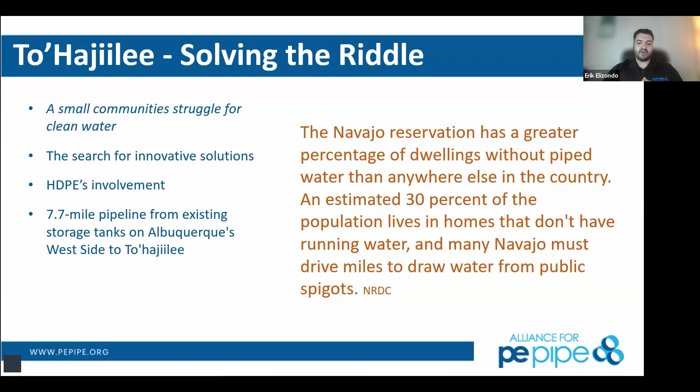It is one of our sales reps' projects out in New Mexico, but it's an awesome project for us to talk about because of the involvement and the impact that it had. The To'Hajiilee project in New Mexico was for a small community struggling to have consistent water. So as you can read on the slide there, it's one of the areas in the nation that has the least amount of public water to housing. So in order to fulfill that need, the residents in that area needed to go and find that elsewhere or drive to the spigots to get water. So HDPE's involvement and our involvement is essentially to help solve this with a 7.7 mile pipeline coming from Albuquerque on the west side all the way out to this small Navajo Nation.

This was obviously something that was deemed an issue by the Commissioner, Debbie O'Malley. They have been searching for some type of resolution, and it had been something that had been on the plate for quite some time in order to ensure that these residents in the area were finding or getting a sustainable water source for an ever-growing smaller community in that area.

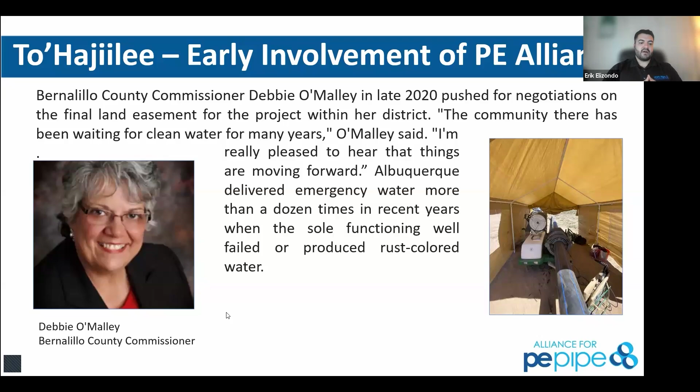What ended up happening, go ahead Alan to the next slide, is Souder, Miller, and Associates actually attended one of these webinars back in 2022 about Open Cut and HDPE's application in that. From that, there was obviously the sparked idea of being able to conquer some of the environmental issues that were going on with the inclines and declines, and being able to move the water all the way from Albuquerque through to To'Hajiilee in order to ensure that these communities got water.

And so they ended up getting together with the PE Alliance. And one of the reasons I like talking about this is it shows the capability of the webinar serving as an initial starting point for projects that move towards HDPE adoption in order to solve long-term issues.

I remember that one in particular. That was one of the very first open cut construction webinars that we did, Eric. And they came to us several years ago and said, 'Hey, we've got this cool project where we think this could work, but we're not really sure.' Walk through it. All of the excavation, deep part of it was a deep excavation, but you guys did really good. And I'd love to see that municipal cycle all the way back through to the end of it here, where you're really supporting the nation itself to be able to push this along.

So thank you so very much for helping them all out.

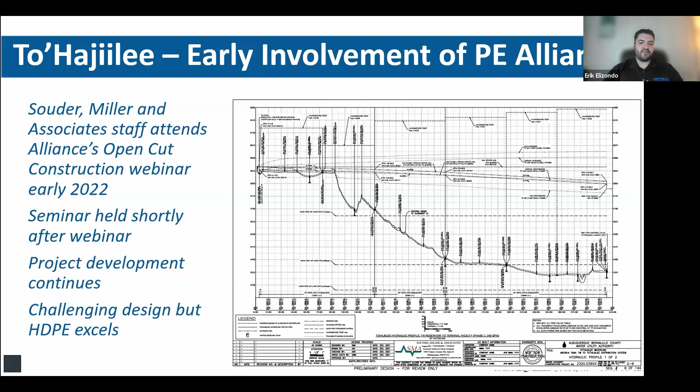After that, it went to bid. AUI, the general contractor we ended up working with, after they got all the rights secured and the pathway secured and had a plan, was a new contractor to HDPE installation in this manner as well. Partnering together from the PE Alliance to the municipality, to the contractor, and lastly to us, to ensure appropriate materials as well as training for doing fusion appropriately, was a task that lasted a span of what is now 3 years, from the original time of attending that presentation, that webinar in 2022.

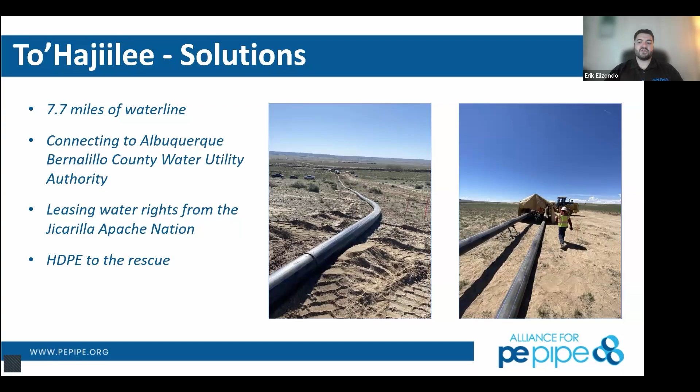There are several different areas in this. They tried to limit the amount of pumps and valves in the system in order to transmit it the entire length. In the project, it's really cool to see the different DRs being used, from a DR7 all the way through a DR17, to accommodate some of the issues with elevation and ensure proper flow, all the way through to ensure that by the time it got to the nation, there wasn't going to be a reduction or loss in the volume of water getting to them, to ensure appropriate water for the entire community.

So Milford, along with AUI, went out, got the training completed, got their guys ready to go, and got set up to do this project out in the middle of nowhere. It was just a really cool project as a whole for us.

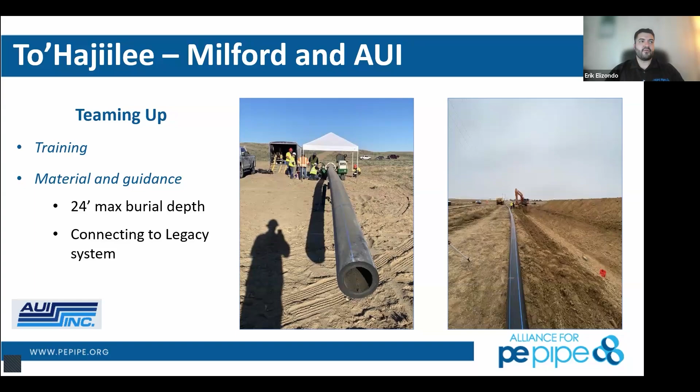For us to see from the beginning stages of having an idea of a need for a small nation, to finding a solution that would complete this task most efficiently and most cost effectively, and to see that HDPE ended up becoming the most preferred method of doing this in an open cut scenario, where you have the option of looking at several other materials to accomplish this job, and yet HDPE was the one that came out on top. That's some of the reasons I wanted to talk about that project.

Well, I'm glad you did. You didn't talk much about the contractor, but Albuquerque Underground is a very experienced polyethylene contractor. I've known those guys for years, Eric. What was it like to work with an experienced contractor on a first job for Souder Miller and also the Navajo Nation?

Yeah, so they've done a lot in the HDPE world. This, I think, was a little bit different than what they're used to. It was something they did have some questions about, especially when we were talking in the realm of specs and approvals. We did have a back and forth with their field hands about getting the right information and documentation, but overall, because they had some experience, it was rather smooth, other than essentially paperwork, Pete.

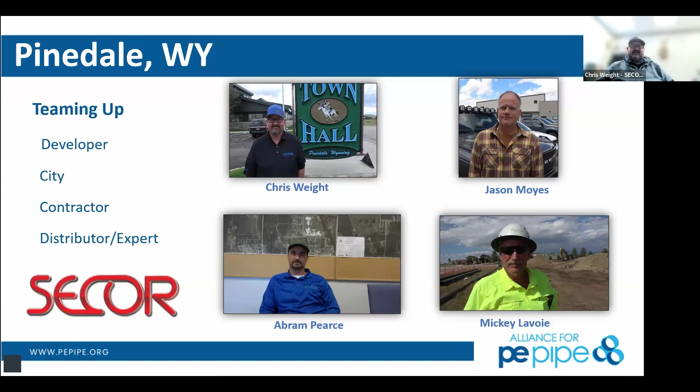The team up there is key, getting everybody on board and on the same page. We did that with the help of Dustin Langston at WL Plastics and my team going down and meeting with all these guys, doing a lunch and learn kind of like this webinar, but live. They had all kinds of members from the municipality there learning about what we could do on this project.

It was an open cut install. We did approximately 2,000 feet of 8-inch DR11 water, and approximately 1,800 feet of 8-inch DR17 gravity sewer.

Thing to keep in mind on the gravity sewers, we did have to debead that, so it took a little bit longer. But we got this entire project set up, installed, and backfilled. They were putting asphalt on the ground and building houses by the time we got to the end of the line, to where they could start selling these lots off.

This is a little town we're dealing with, but we were dealing with depths of only 7 to 9 feet. As you can see in this picture behind the guy doing this tap, the groundwater was really high down here. So we had to ballast the pipe and get it to sit on the ground at grade, then backfill with our aggregate and go from there.

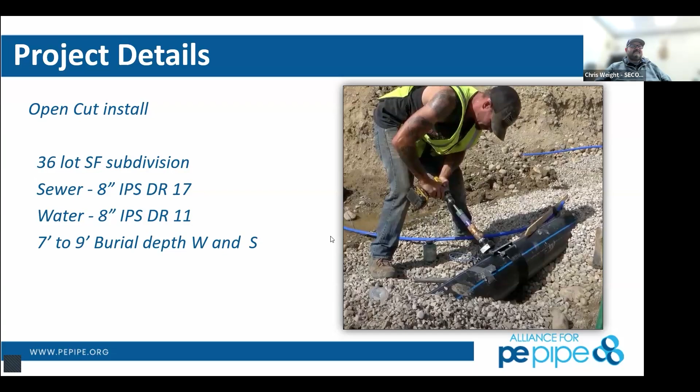A few pictures from the project you can see here. We ran all AVK Series 66 valves - a great solve to not have to run mechanical connections.

Concrete manholes, all the sewer - they kept everything tight. When they cambered it, they found one spot in 1,800 feet that had about a quarter inch of water in the bottom of the pipe. That's how tight of a spec the contractor maintained on all of that.

The other nice part about the HDPE in this situation is EPA stated that we had to be 10 to 12 feet apart with the Bell and Spigot legacy material. Once we proved to them on the HDPE, they let us go down to 6 to 9 foot separation on this entire project, which made the excavation a lot smaller and helped us out quite a bit there.

Hey Chris, you talked about the AVK Series 66 valve. Tell me what makes that different from the traditional AVK seated gate valve?

Yes sir. So the AVK Series 66 valve is actually a fused in-line gate, AWWA gate valve. They press the pipe on, put stainless steel rings around it, wrap them, and there's no mechanical fitting there whatsoever. You just butt fuse it right in line, or electrofuse it however you want. It's a great solve to keep mechanical connections out of the ground, since every mechanical connection can become a leak point at some point or another.

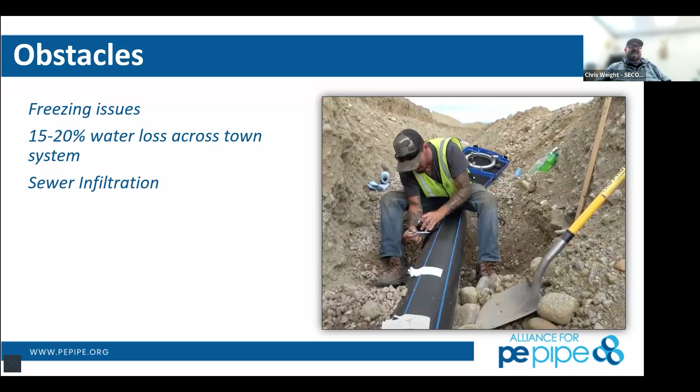The main lines weren't as bad. The town itself was running 15 to 20% water loss. Obviously HDPE is going to cure a majority of that, and their sewer infiltration was atrocious. They were selling approximately 500,000 gallons of water and taking in 1.2 million gallons of sewage into their sewage treatment plant, which was huge. That's why the HDPE was decided upon, so we didn't have any infiltration problems.

This is just a typical installation that we were dealing with. There was a cul-de-sac in this, and we ran everything around, so it was a complete closed loop system, but they had the ability to divert and shut the cul-de-sac out if they had to do a repair or anything like that.

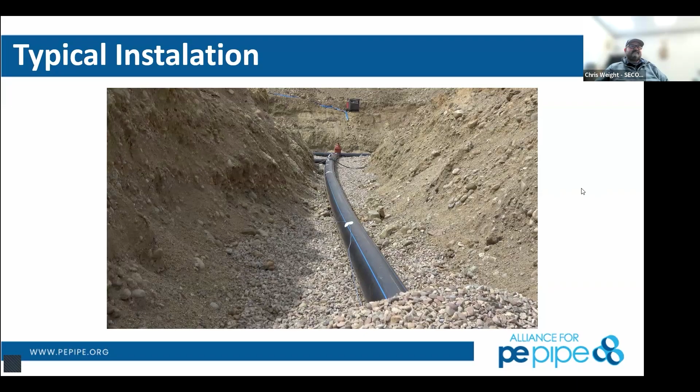Here, we did just do this - it was all completely wide open, right? So we fused this because we had to.

So Chris, that's showing your Series 66 up close. What's that light blue pipe? Are you doing a pressure test right there? Yeah, so that's how we filled the line to pre-chlorinate and pressure test ahead of the line being put in service, which was extremely nice because you can do that with all polyethylene. You can pre-chlorinate and pressure test above the ground.

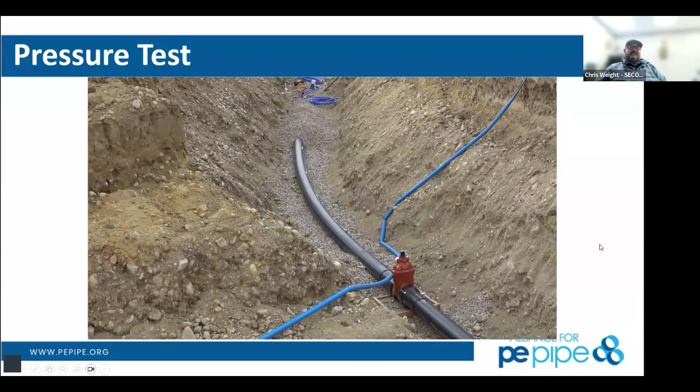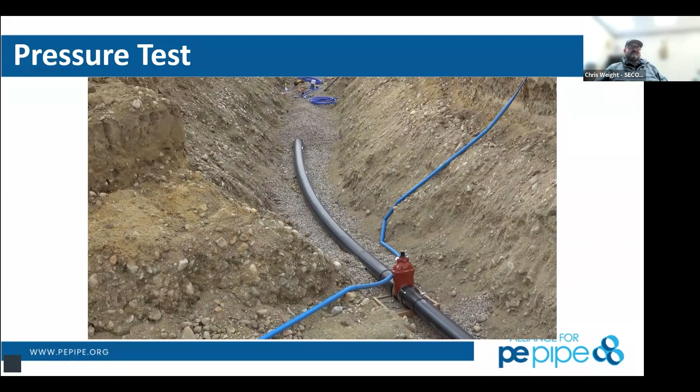Or you can have it in an open cut situation like this, sitting there, and pressure test and pre-chlorinate right there. But that blue line we actually ran from a fire hydrant down to chlorinate with the city's already chlorinated water. They gave us a chlorine spec that we had to meet at the end of the line, and we met that spec, let it sit that way, and they were good to go and put it all in service.

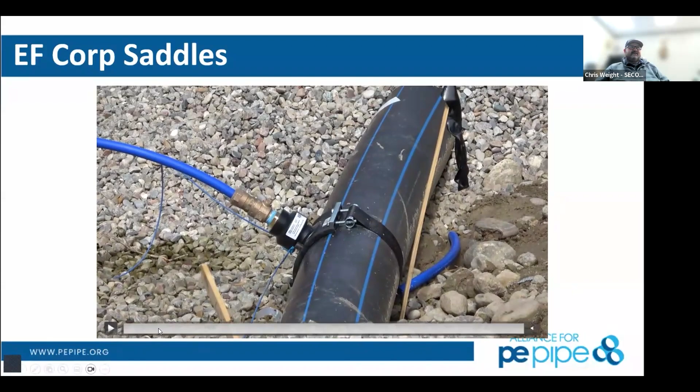Another picture of a tap, this is how we were tapping the lines. We used integrity saddles with 1-inch corporation stops that were compression onto HDPE. Yes, it's blue, but it's still HDPE SDR9 service line, 1-inch CTS.

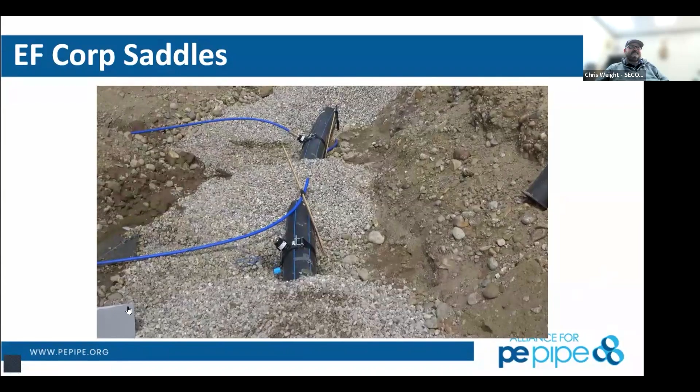Here he's actually going to tap this line in a live tap format. Yeah, Chris, we haven't shown this ever in the webinar program before. So this integrity saddle, we call that an electrofusion corp saddle. It permits the owner to put a corporation in there. So this line is charged.

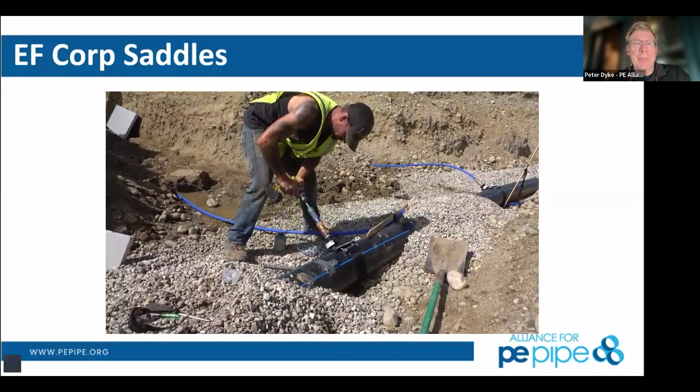With that drill, he's running that drill bit into the wall of that polyethylene pipe. And I guess, Chris, it retains the coupon as it comes back out? Yes, the cutter actually holds the coupon when it comes back out. They'll pull that up inside. You can see a little bit of leakage coming by. He'll close that corp stop, but that coupon's up in the cutter. So when he pulls that cutter out, he'll have to take the coupon out of it. He'll just screw his tap tool right off of there. He'll purge the line, hopefully, so they're not shoving any little potential shavings up into the service line and into the meter.

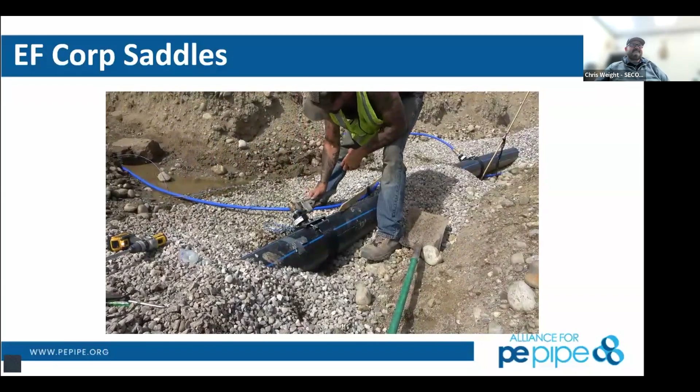Again, you can see how close the water and the sewer were. These are actually running right in the middle of the roadways. Great situation here for an open cut installation.

Actually, in actual fact, the elevation of that sewer is higher than the elevation of the water, which is something unique. I love that you educated Pinedale enough so that they could do this with confidence, because neither one of them leaked. So I guess it really didn't matter.

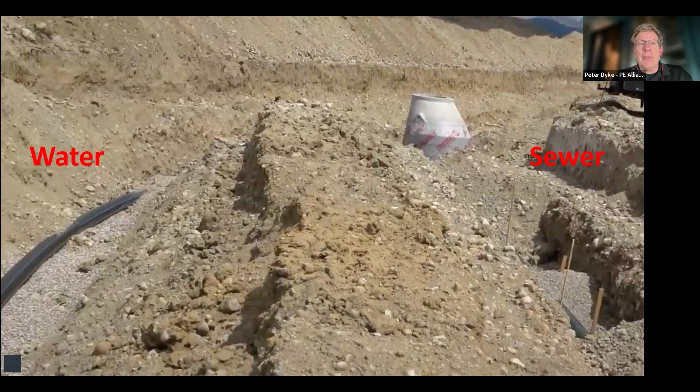Just to add, you called this a little town, but it's a town that's really growing pretty quickly just south of Jackson, Wyoming. Yes, sir. The developer doing this actually has some more projects on the horizon, and he gave me a rough number at one point that he was going to more than double the town's population in the next 5 years. So it's going to be a very sizable town, and obviously Jackson, Wyoming is spreading out, so eventually it could be one of the bigger municipalities.

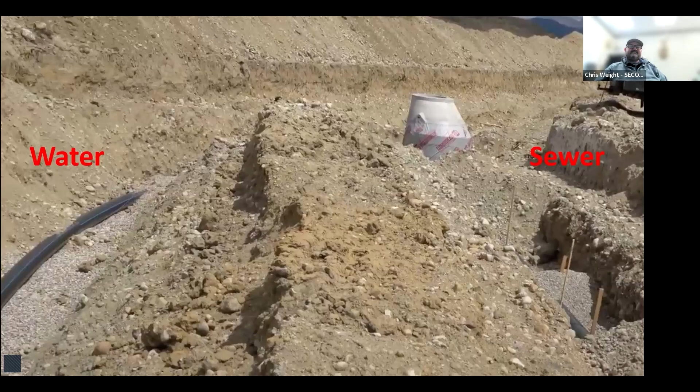So this video kind of speaks for itself. This just shows you how resilient polyethylene is. I got to jump in the trackhoe and run this over just to show. And in the middle there, you can see.

Wait, hold on a second. Alan, could you click on the play button? Actually go on the screen and click on play, because it's buffering.

In the middle of this, right close to the middle of the track, we actually have a fusion there where we made the fuse, let it cool the minimum amount of time we possibly could, and took it out of the machine and then ran it over with the excavator.

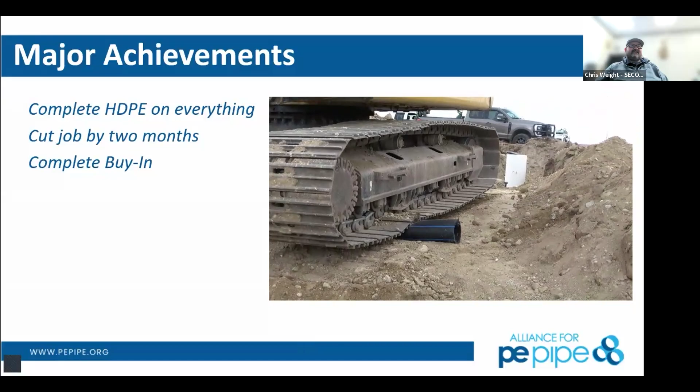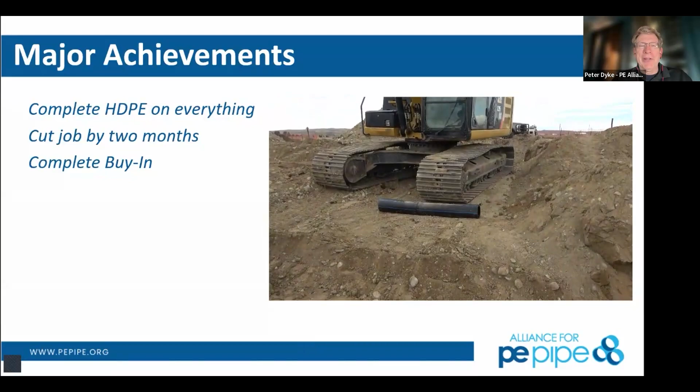Yeah, this falls under the category of let's not do this at home. But Chris was kind enough to get in that excavator and drive over it. And then we just brushed it off to show the fusion and also show that the tracks really didn't damage the polyethylene. Now, Alan, we do have rules, and these kind of violated the rules for compressing on the polyethylene pipe. Am I right or wrong?

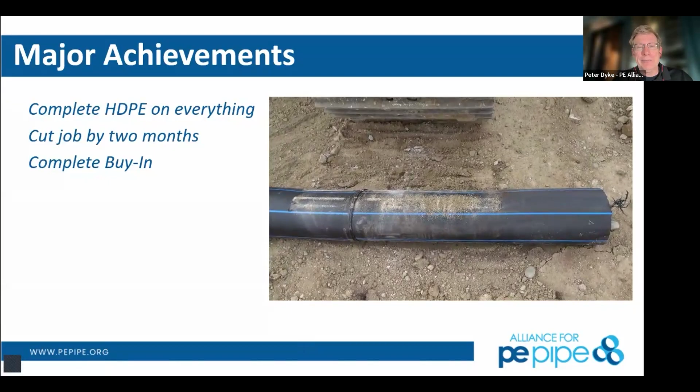You're absolutely right. What's going on is if I type an answer, Pete, and the video is on, then it just distracts from it. My phrase for this was, why would anybody want to jump out of a perfectly good airplane, right? We have a perfectly good butt fuse joint.

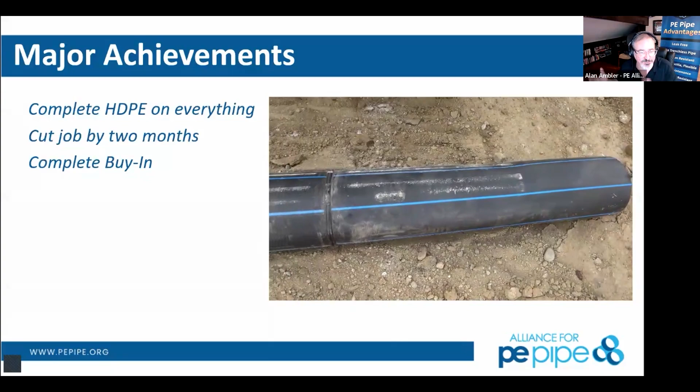Let's keep it going. But you can fully occlude the pipe by squeeze off. If we go down at a specific set time period for the DR and the size of the pipe, and then we let that squeeze off relax through another time period, as long as we don't violate those two time periods, then we do not damage the pipe in that manner. It's often used very much so in the gas industry itself.

But gosh, look at the visual alone. You guys, part of what the Alliance and Chris does is come up with all these really cool things to do, and you certainly did overachieve, and that is a true compliment, Chris. So good job. Oh, thank you, Alan.

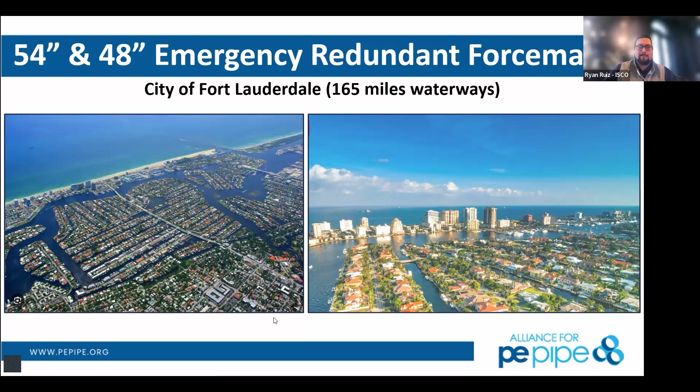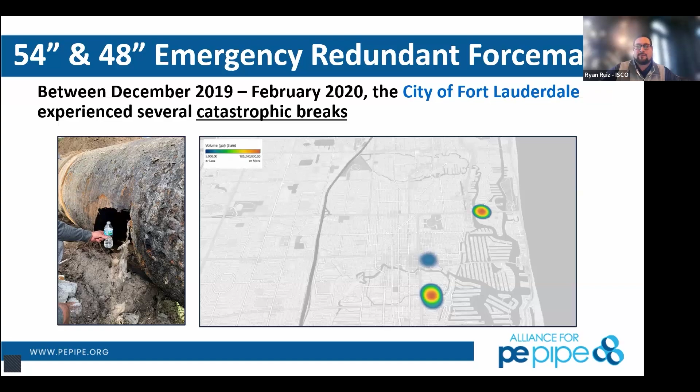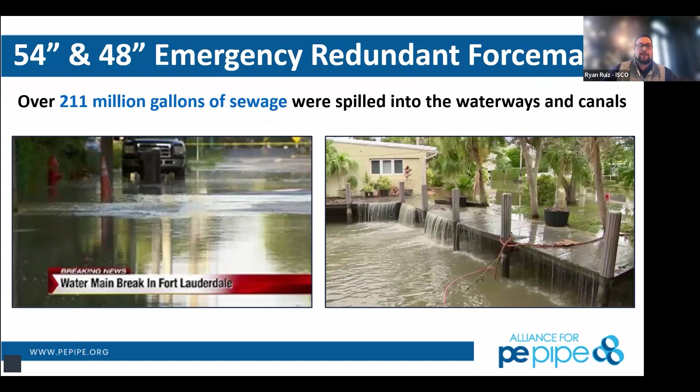Between December 2019 and February 2020, the city of Fort Lauderdale experienced a lot of catastrophic breaks in their sewer force main. As you can see here, there's a large amount of pipe missing. And on the right, this gives you an idea of these catastrophic failures and the areas they were in within Fort Lauderdale. Over 211 million gallons of sewage spilled into the waterways and canals. They had vac trucks working 24/7 for close to 5 months to help remove some of the sewage that was being spilled into the city's force main.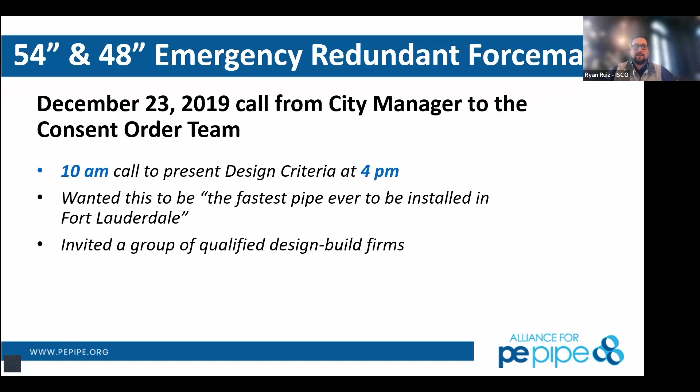So in order to do that, ISCO teamed up and invited a group of qualified design build firms to help - basically a design build type opportunity project. Two teams were selected, basically broken up into 2 sections or phases - a north phase and a south phase, roughly 38,000 feet of pipe, $65 million, and about a year and a half of construction. You had the city of Fort Lauderdale teaming up with Murphy Pipeline and DM construction groups and engineers to come up with solutions - a lot of trenchless solutions and some open cut.

But let's move to the next slide, please. Yep.

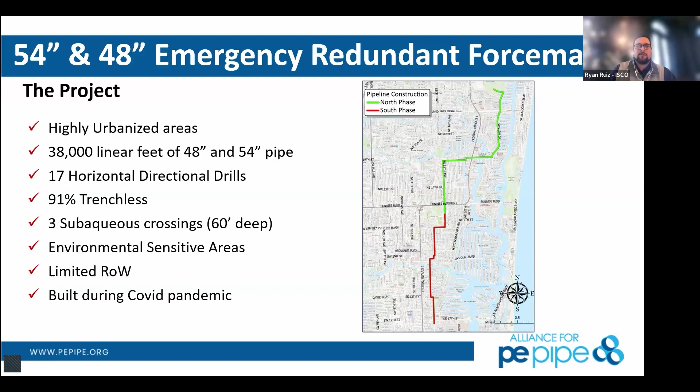So the project here, looking at the map, highly urbanized areas, a lot of homes and businesses to work around. Like I mentioned, 38,000 feet of 48 and 54-inch DR17 pipe. Had 17 HDDs, most of this project was trenchless, some as deep as 60 feet on some of the directional drills. Being in these urban areas, you have very limited right-of-ways to do these projects.

So why HDPE? I get that question a lot. Here in the Fort Lauderdale area of Florida, there's high salinity in the ground, a very corrosive environment. HDPE is very abrasion resistant, so it reduces any scouring that could happen to the material.

Another huge thing was the ability to manufacture custom-made fittings on site, which we'll look at in a little bit. There were some prefabricated options with HDPE, but what made polyethylene great for this opportunity was the ability to make custom bends and fittings on site.

Also, HDPE is considered jointless and restrained pipe, which allowed for less clearance from other utilities. One unique part of it is it's also leak-free. In many instances, the spacing we put between a gravity sewer system and a potable water system, or vice versa, is dependent upon one leaking into the other, and we simply don't want that to happen. We had some questions previously about leaking, and it's a leak-free product.

So keep going, Ryan, you're doing great. Thank you, Alan.

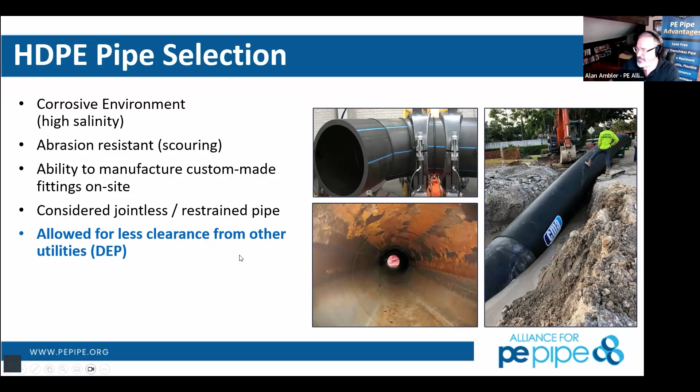Mentioned majority of the job was trenchless applications, 91% to be exact. There were 17 directional drills that helped avoid DOT roadways and things like that. This project also consisted of some compression fit lining of pipes that were failing.

Pretty amazing stuff going on here. You can see 54-inch, 3,100 feet of 54-inch shown here on the left image. The 48-inch, two examples here, one very impressive one in the 2,600 feet of reverse compound curve that the driller made. Pretty amazing stuff.

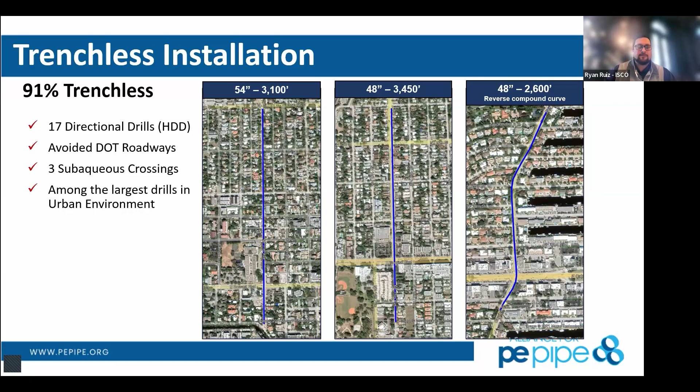Some pictures of job site conditions, whether it was fusing and laydown areas. Here's a picture of a fusion operation in a very limited right-of-way in this urban area of Fort Lauderdale. They're basically building out strings of HDPE pipe, preparing it for trenchless installation.

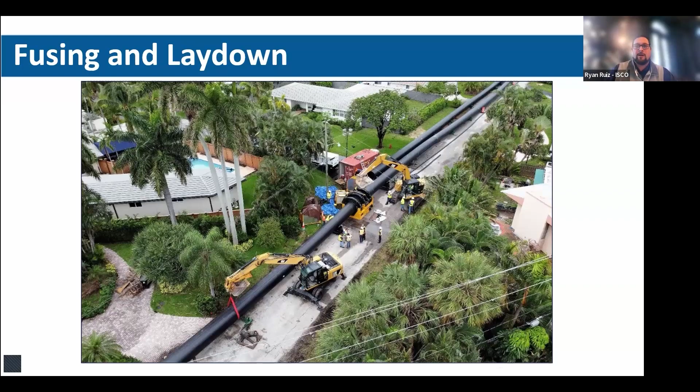Next picture. I mentioned this earlier, HDPE is fully restrained, so there was no need for mechanical restraints. These are butt fusions that are as strong, if not stronger, than the pipe itself, so there's no need to install mechanical restraints on this job.

This picture at the bottom shows a directional drill that was made up 60 feet deep, 1,600 feet long, under seawalls, with environmental permitting through the United States Army Corps of Engineers. Just an incredible opportunity here for HDPE to excel and create an awesome solution.

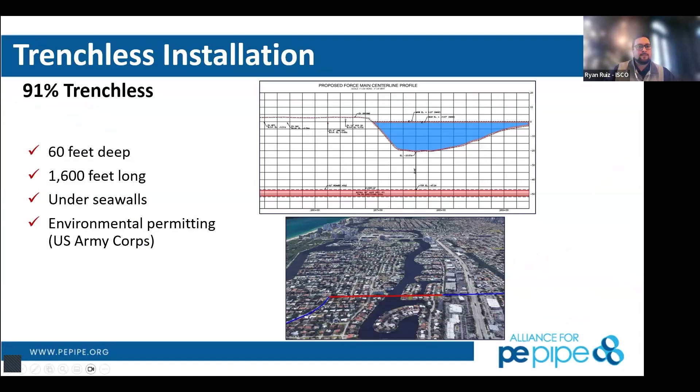So I had mentioned custom-made fittings, or the ability to make fittings on site, mitering pipe and fusing it together to make custom elbows and things like that. These two pictures show examples of that, and show some of the utility conflicts that existed on the job. In these open cut applications, just because we were able to open a trench doesn't mean we were allowed to just set the pipe into the ground. We had to navigate these utility conflicts throughout the project.

Hey Ryan, one of the concepts I've heard you talk about is the issue of equivalent dimension ratio as it relates to fabricated fittings. Could you briefly share with our audience why that's an important concept to understand? Absolutely. So when engineers are designing projects, one thing to look at is the pressure rating of the system. What do we need to meet in regards to that rating? For instance, DR17 HDPE pipe is pressure rated for 125 psi at 80-degree temperature and lower.

When you're dealing with fabricated fittings, you have to derate that fitting. So if I were to make a 45-degree elbow, like the two in this picture to the left, out of the DR17 pipe, what we call feedstock, and fuse it together to make that elbow, I'm going to have to derate that fitting lower than that 125 psi rating. So what we do is make the fitting out of a thicker wall pipe, a lower DR, in order to allow for that fitting to be fully pressure rated.

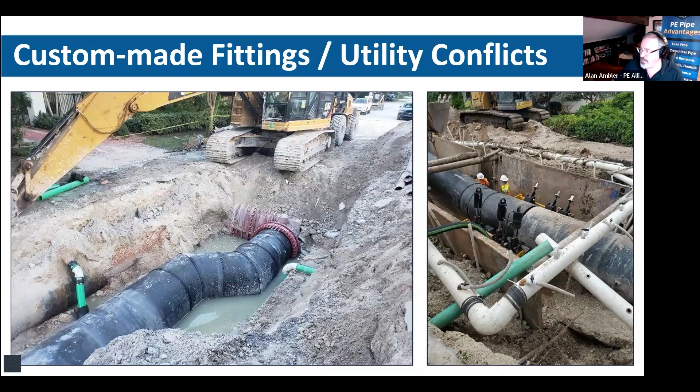You're doing great, Ryan. We are cruising.

All right, so just these next couple of slides are examples of these custom-made fittings, right? And just the interferences, somewhat headaches, right? When we're trying to remedy these issues, you have all these existing utilities that are conflicting with our work areas. So being able to custom fabricate fittings and spools on the job was very crucial.

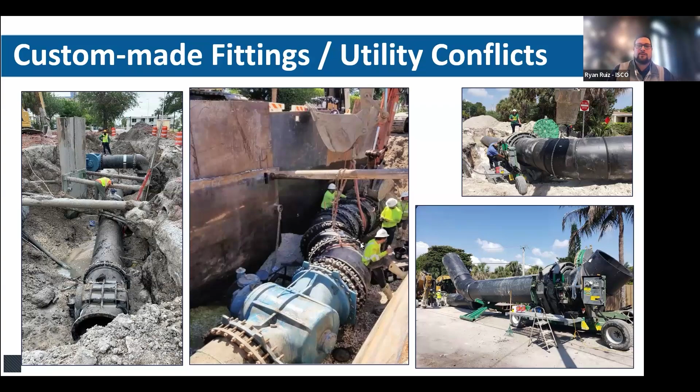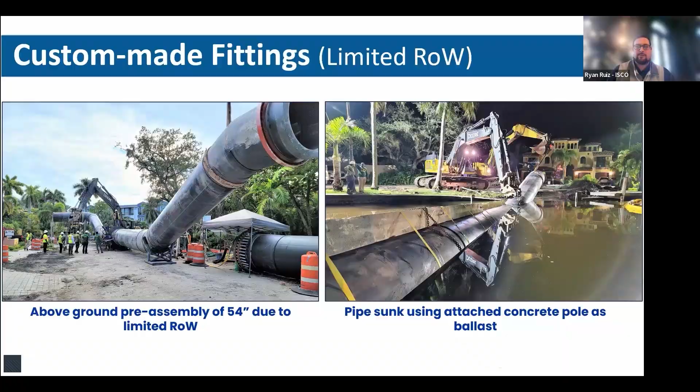So corrosion resistant, H2S resistant. I mean, these are the reasons why this opportunity to rehab and repair this emergency job came about with the solution of high density polyethylene.

Well, great review, Ryan. You know, Fort Lauderdale has taken the lessons learned from this project and they've begun using polyethylene to a much higher level. In fact, most of this was 48 and 54-inch DR17. They now have done the second time this has ever been done, a 54-inch DR11 job in Fort Lauderdale. So great job to ISCO and Chen Moore and Murphy and DMSI for pulling this together and basically saving the day in Fort Lauderdale. It's amazing what polyethylene can do.

Great description. Thank you so much, Ryan Ruiz. Thank you for having me.

All right, moving on. We have another good friend here, Matt Danysh from Agru. That 54-inch DR11, Matt, was made, I think, by Agru.

Yes, that's correct. We made the pipe for that project. They needed the wall strength for it. And we just came on board with making that product in the last year and a half. So something new to the market and definitely a great application to use for that project. Yeah, pretty exciting stuff. And your pipe's going to be featured here again shortly, Matt. So congratulations on having the technical ability to make high pressure polyethylene, so 200 PSI up in those larger diameters.

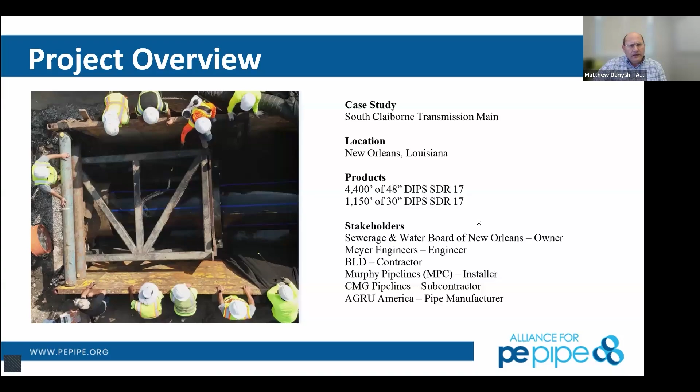This compression fit uses the existing line as a host pipe. And if we go to the next slide, we'll talk about the compression fit.

Next slide. So basically the project was after Hurricane Katrina wreaked havoc on New Orleans infrastructure. And the amount of cost that the storm did was overwhelming, but it wasn't just the storm that did it. They had issues with corrosion that had been going on for a while. And with the storm and the additional amount of moisture in the ground and ground movement, it caused a lot of the lines to start breaking, which caused them to have issues with leakage, shutting lines down, which would bring in infiltrated water.

The boil orders that the city had to have ordered were just incredible. I'm not sure if people on this line can understand the issues with a boil order. Whenever you have to boil your water, it's a tremendous pain to the residents who have to take their water and boil it before they can drink it or use it in any application for consumption. So being able to come up with a solution for them...

So, Matt, it's not just the residents, but also the restaurants and everything else. Restaurants everywhere, right? Yeah, so definitely in New Orleans, that would be a massive impact for a boil water notice. I'm glad you pointed that out because that's a social aspect of pipe failure that's not often thought about. It's mainly thought of as an afterthought, and you have to live through something like that to fully understand it. That's a great observation, Matt. Keep going, good job.

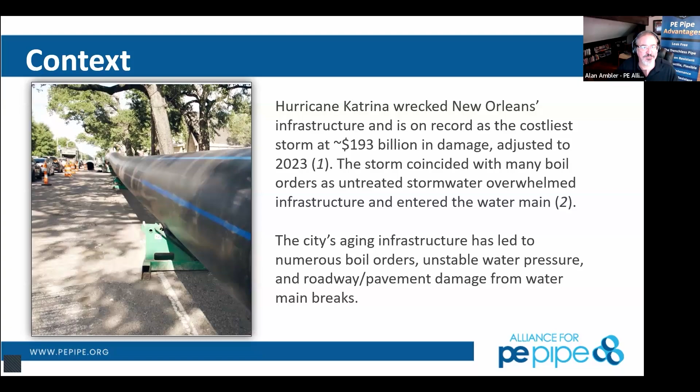So yeah, the city was looking at alternatives, what they can do to fix their problems, because it wasn't just that the broken lines were running underneath city streets. They were having cars falling into holes from the broken water lines. And so to rectify the situation, they launched a massive project to replace their 100-year-old water transmission lines with modern piping systems, which is where HDPE came to mind.

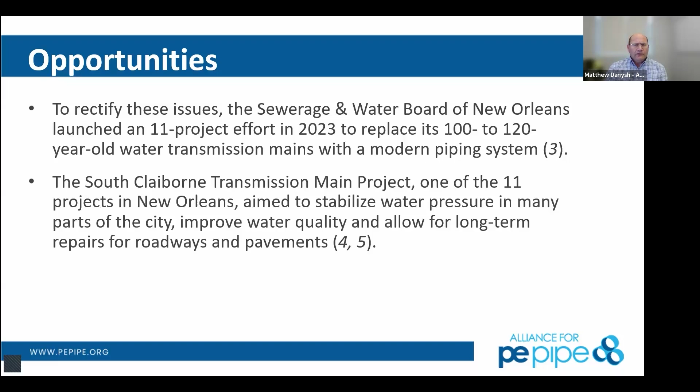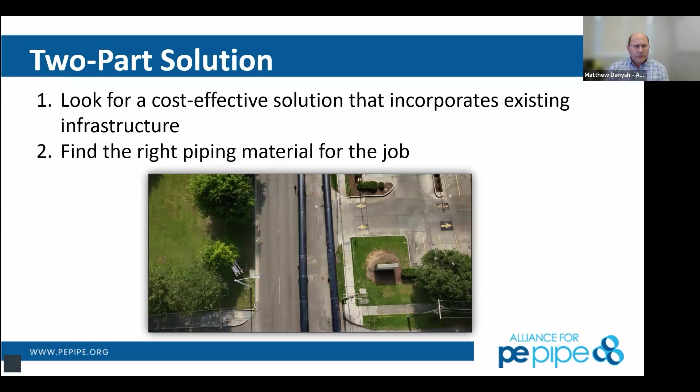Since they have very limited access to the right-of-ways, they couldn't just dig up the existing pipe to replace it. So a very cost-effective solution for this project was to do what they call a compression fit. The next slide will show the compression fit for this material. The reason compression fit was used is because it has the ability to use the existing pipe, and you basically pull a new pipe of HDPE into the old pipe. It has a tremendous amount of pulling force, but we were able to do about 1,200 feet at a time with this compression fit.

The compression fit is basically taking a smaller diameter pipe, or a pipe that may be at the same ID size as your existing pipe, and it's compressed, meaning it's pulled under stress using an orifice or ring chamber to basically reduce the size of the pipe as it's being pulled. This technique was studied for this project, and they figured they could use it because it minimizes traffic for such a busy city with very limited access. Being able to have long strings of pipe pulled in at one time minimizes the amount of footprint that's being disturbed.

Next slide. Oh, this should be our video showing the project.

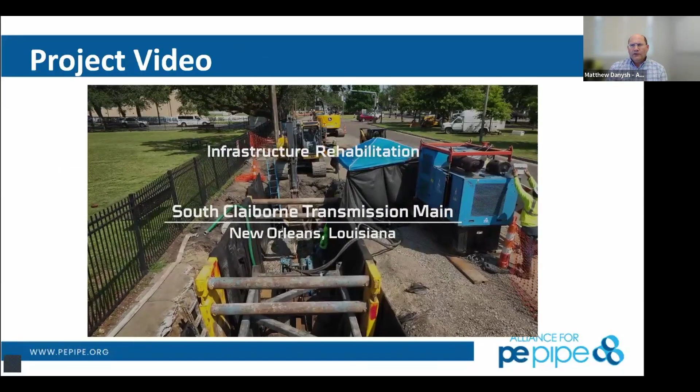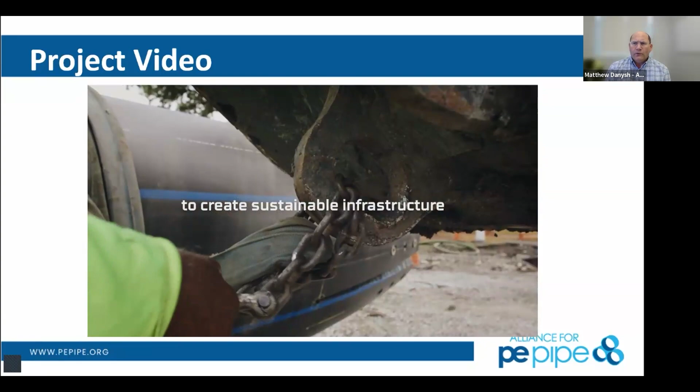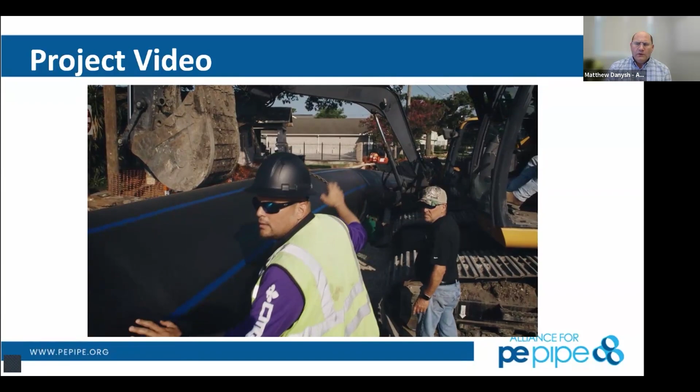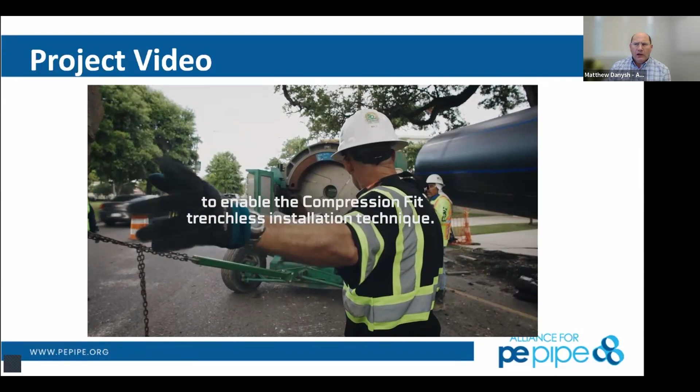On this project, the compression fit line is basically an HDPE pipe that's pulled into the existing pipeline, and it goes through an orifice chamber, a ring chamber, that holds the pipe back and stretches it, reducing its diameter so it can be pulled into the host pipe. As it's being pulled into the pipe, it's under tension, so it contracts in its OD so you're able to pull a larger pipe into a smaller area. As you let it set over time, it will expand back to its full diameter, and that process allows you to maximize your inside diameter.

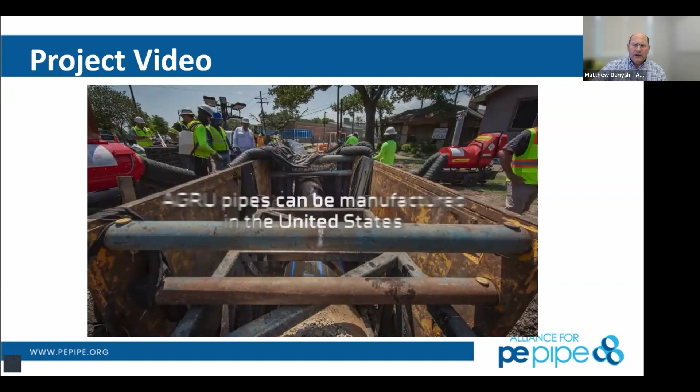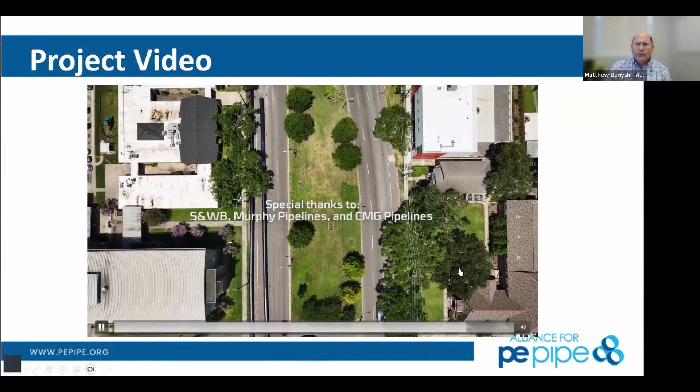As you're seeing here, they're spraying water on it to cool it because it does get a lot of heat when it goes through that orifice ring. It also acts as a lubricant for spraying water on it. When it pulls it through, you're able to have a pipe that's the best fit for your existing pipe. This is showing the pipes being prefabricated, ready for pulling through the line. This process is somewhat quick. You can pull it, as you saw the guys spraying it down, at a fairly decent rate, and every 1,200 feet or so is where we had to come back in and do connections.

Next slide. Before we go on, Matt, this is a great opportunity to answer a couple of good questions. The existing pipe material we're looking at to use compression fit slip lining happens to be something we can clean all the tuberculation out of, but not necessarily pipe burst, so we're not going to be able to fracture that pipe—otherwise you'd use pipe bursting. We were asked if you could compression fit corrugated metal pipe that is heavily corroded. Oftentimes that pipeline has jagged surfaces through it, and the problem with replacing corrugated metal pipe in place is there's not ample hoop strength to be able to shear and break it easily.

So we're not even going to be able to pipe burst CMP. If you have room, what we'd look at more is slip lining. We really don't want that to be able to push up against the corroded surfaces of what we're looking at for CMP.

Great questions out there, everybody. Yeah, really that's a good question, because basically your host pipe has to have some type of structural capabilities to hold the resistance of the pipe as you're pulling it in. So if it's a pipe that does not meet that criteria, then you have to do a slip line, meaning the pipe is smaller in OD than your ID, so that there are no drag forces established from the pulling forces of the pipe going through.

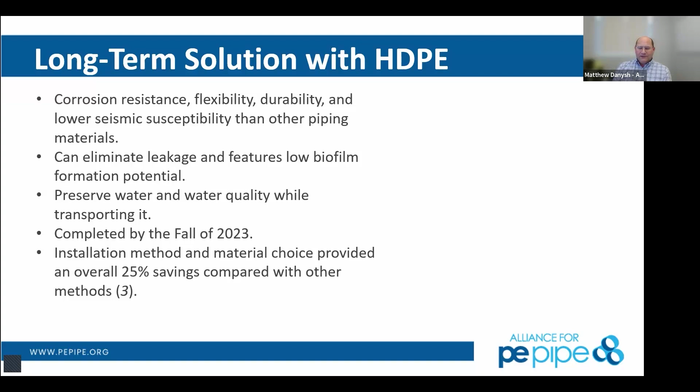Preserving water and water quality when transporting - this is interesting because what we're seeing now, when you have a system that's all HDPE, is that water quality is better, meaning you don't have leaching out of metal, rusting, and things like that. But the other thing it does is minimize the amount of chlorination or disinfection needed in the water. So with an all-HDPE system, you don't have to use as much disinfectant to maintain a minimal carrier of disinfectant through the system to the end of the pipeline. That definitely improves water quality for the end users, because they don't have to be smelling the disinfectant chlorine or whatever is used in the final product. It'll minimize the amount.

Oh, I think we went back too many slides.

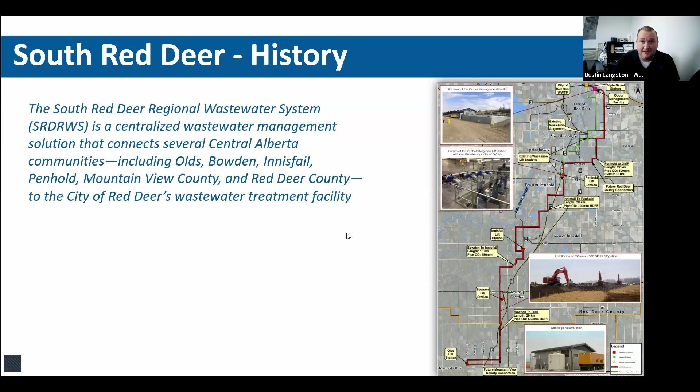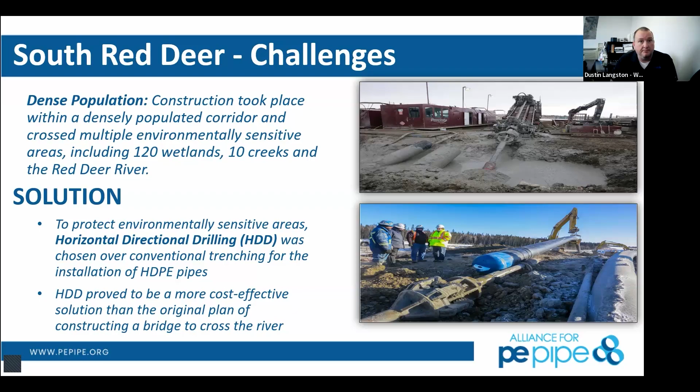So Dusty, I recall Brent Penner and his Fusion Tech team played a pretty important role in this job at Sandale — is that correct? That is correct. Pretty much any of the big tie-ins, the contractor themselves came in and did a lot of these fusions, but anytime they did a drill and had to do any kind of connection or electrofusion, Sandale and Brent Penner's team really stepped up to the plate and helped these guys. This was a multi-year project — a really, really big project.

So one of the biggest ones is Highway 2 — they call it the QE2 — and having to go underneath that. That was a big part of, one of the big worries, how do we get under this road with HDPE pipe. There are a lot of options.

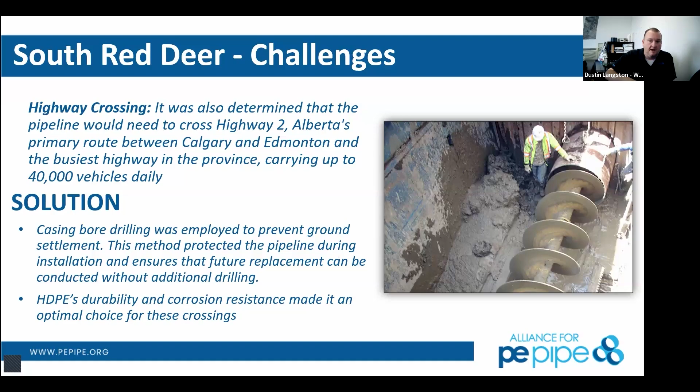Some people will actually directional drill a steel casing first and then put HDPE pipe through the steel casing. But this is another great method we're going to use here, a bore. Instead of directional drilling, we excavate down to the depth we want our pipeline to be, jack and bore a steel casing under the highway, and then sleeve HDPE pipe into that.

That was done with no disruptions to traffic above. They were able to completely install that section without shutting down or slowing any traffic, which is good because they get about 40,000 vehicles a day across that QE2. Just a heads up, Red Deer is about halfway between Calgary and Edmonton, so there's quite a bit of traffic up there.

Winter weather. Anytime I get questions, especially from people in Texas or Oklahoma, like 'it's below freezing today, should we be shutting down our job sites?' I always just kind of chuckle. I'm like, we've got guys in Canada and North Dakota installing this stuff all winter long.

So when things do get very cold, on this particular project they were welding pipe in the winter when it was negative 30 degrees outside. Anytime you get into those extreme colds, you have to think outside the box, or in this case, inside the box, because they wound up using shipping containers. They actually built out a shipping container with the fusion machine inside of it, and had heating inside as well.

You can then couple this idea with preheating of joints. Instead of bringing in a super cold joint, you'd put some kind of heating blanket, or you could even use a propane heater, but make sure you're setting it far enough away from the pipe that you're not damaging it from excessive temperature. The rule of thumb is if you can stand in front of the heater, that's the distance you need to have it at least away from the pipe to preheat it.

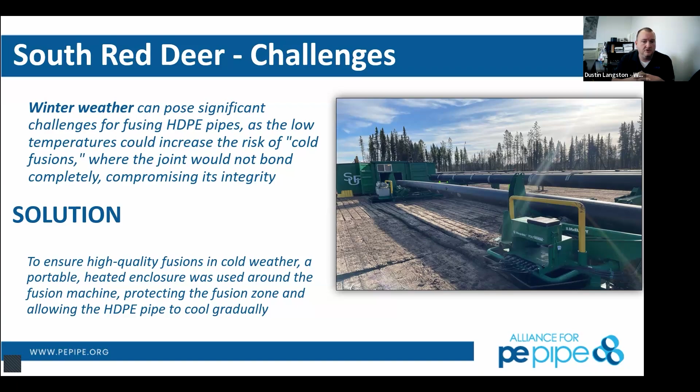And then once it would go into the fusion trailer or the shipping container, it's heated in there as well, and they perform the fusion just as if it was a nice warm sunny day outside. So it was a really, really good way to do it.

Here on the right-hand side, this is a track hoe that has a special built cradle to be able to run that pipe into the trench. They'd be able to cradle that pipe, move it into place, and lay it down into the trench without scraping it up or gouging it, like they might if they had used wire rope.

Hey Dusty, we had two good questions. Is there a concern with locking the HDPE pipe within the casing given the thermal expansion properties of HDPE? I'll give you a softball there. We're looking at changes in thermal temperature in between it, and then on the edge of those casings we're going to look at terminal connections that are reinforced and restrained connections, correct? Yep.

So in that particular case, there's really two ways of thinking about it. You can use spacers to centralize the HDPE pipe in the casing pipe, or you can use some kind of grout to fill the annular space between the two. That can be done, but it's a little less common. Spacers, I'd say, are probably the more common of the two.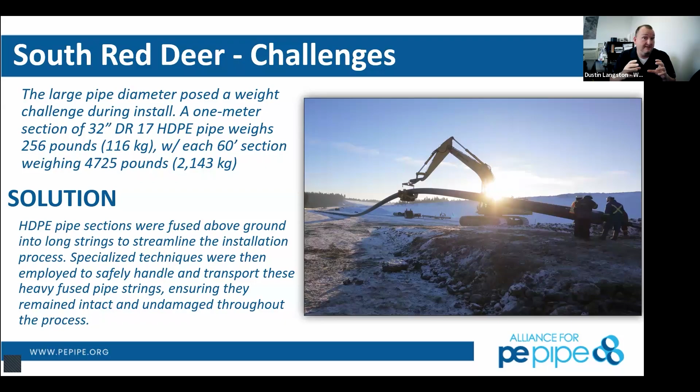And if you're using spacers, it's not really going to be able to expand and contract either. And if it were to, it would just fit tighter up against the casing pipe. Either way, it's not hurting the polyethylene pipe at all. But that's a good question. We did a project here in Salt Lake City, Utah, very similar under I-15, and they used spacers on that project - no footings exiting, just spacers. But thermal expansion contraction, we're not worried about that.

So in total, this was over 22 contracts. It was a huge project, $140 million project, won several awards in Canada. And it was done without a hitch. Well, actually, that's a lie - we had one hitch. One of these pipes was laid right next to the road, and there was a huge car accident, like a 3-car pileup, and they hit the pipe because it was right by the road. A car got knocked into the pipe, and they had to do one repair before they directionally drilled that string in. So that's the one hitch we had - a car accident damaging the pipe.

Well, great job, Dusty Langston. And I guess they used WL pipe on that project - is that true? Well, yes, they did. Yeah, of course they did. All right Dusty, great job. Thank you, and we've got plenty of questions to keep you going. So Dusty, please hit the bench and help some of those guys.

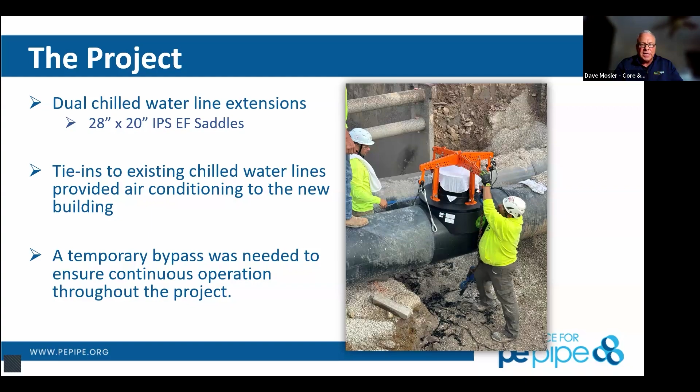So you do need to work with people who have been trained and have a great relationship with their suppliers. For this project, my two technicians, Ben and Mike, traveled down to Jacksonville and were trained on how to install this. They installed a temporary bypass so we could vacate this line, along with that fitting and this spider tool we also get through our vendor, Strongbridge International. Now the challenge is that they've designed these fittings to go on vertically, coming up off the top of the pipe, but that's not the real world - in this case, they had to go down at an angle. You'll see we've cleaned off the pipe there - a couple things you'll notice, it's darker in color. We've removed about 7/1000 of the top surface of that pipe in order to remove any oxidation so that we get a good bond when we melt two virgin surfaces together.

You'll also see that there are some rerounding tools. That's what those clamps with the orange straps are. We're bringing that pipe into perfect roundness so that the fitting, which is made to a perfect roundness, actually fits snugly and correctly on the pipe.

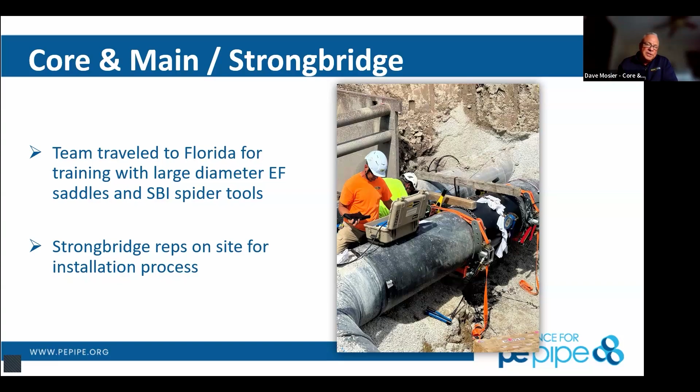Like I said, my guys traveled down there. Since these had never been done in a non-vertical application, the technical people from Strongbridge actually traveled up to Milwaukee to participate in the project with us as well.

You'll see here now that we've got these extended down in 45-degree angles off the main line, and then we had to take a regular butt fusion machine, take it down in the ditch, and fuse the rest of that on the line that's going to come off of that.

One thing I'll note is that before we cored out the holes, we actually put a cap on these and did a low pressure air test to assure the integrity of that electrofusion connection. And obviously they passed. A couple of days of work, long days, but great partnership with our contractor on this.

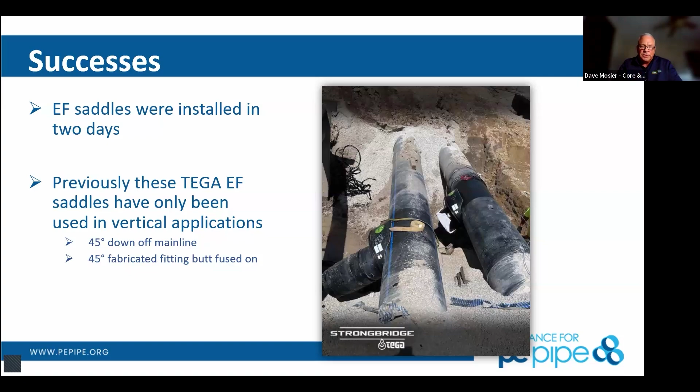And again, that owner just saw the value in a completely leak-free fuse system. Well, I'm sure you played an important role, Dave, in educating the owner about there was actually a polyethylene solution for their need.

Yes. And it was one that we honestly hadn't used before, but we were aware it was there, and we immediately committed. It would have been easier for us to try to promote something else, but it really was the best thing for that application. So we took the time and the expense to get ourselves educated, and did a great job for them.

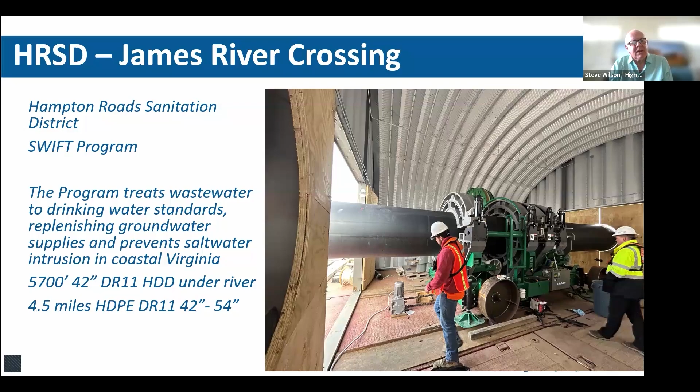So the only way to do that was with the HDPE. This was a record-setting drill in the fact that the 5,700 feet was record. It's also was extremely deep. So we're talking about deep drilling. The channel is about 60 foot deep where this pipe crosses underneath the main channel. They went an additional 100 feet deeper than that in the directional drill. So at about 160 feet down was the depth that this drill took place.

There were lots of different people involved with this. Of course, there were the owners, there are geotechnical companies, there are engineering companies. There's Garney Construction, who was the primary contractor on this. They did this as a design build. And like I said, the 42-inch pipe has been in for quite some time.

They're currently in the process of adding about 11,000 feet of 54-inch SDR11, another 6,000 or 8,000 feet of 48-inch pipe to this to complete this. We're still about 3 to 4 months away from completion at this point. That's kind of just a quick rundown on it.

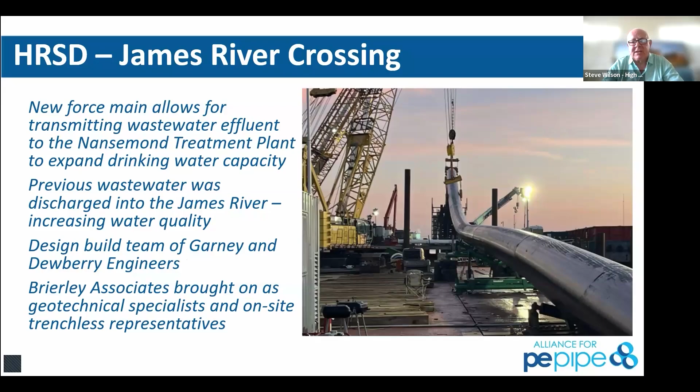You can see here it's showing all the different people that were involved, Garney being the contractor. They were in joint design build with Dewberry Engineers. Brierley did all the geotechnical work on this, which was quite extensive because of the very soft clayey soils that are deposited underneath here. What you're seeing in the picture here is just them setting up for the actual pull through.

Let's see here. What have we got here? It's saying 8,000 feet of 42-inch pipe, but there's 5,700 that was actually done in the directional drill. The other was added at another point.

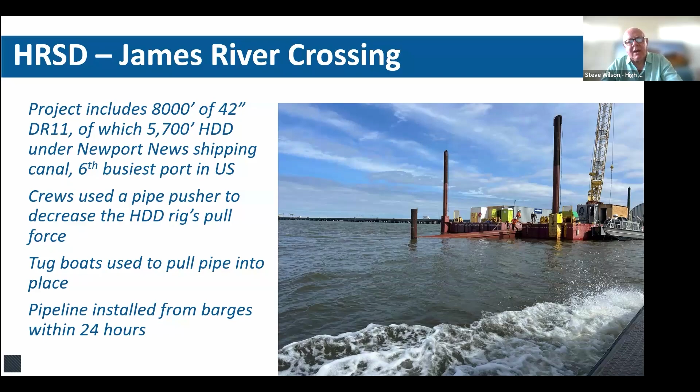What's unique about this drill is that the length, the angle of the bore, the depth, and everything involved was such that if they were just doing a pullback, it would have exceeded the strength of the pipe itself. So with Garney and Dewberry, they procured a pushing tool out of Germany that they put on the backside of the pipe, and it would grab the pipe and push at the same time the other side was pulling. By doing that, they were able to not exceed the tensile strength of the pipe throughout the pull and make this historic long pull.

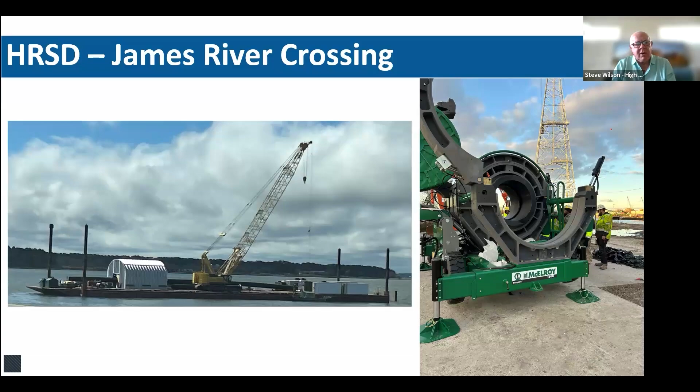The picture they show right there is actually just the fusion barge, all the pipe for this 42-inch line, and all the pipe being installed today is being done on open water. The pipe is floated out on the barge and then lifted with the crane onto the barge. You can see there's a shed there where the machine is, they've pulled the cover off the machine. But they can move that cover over the top so they're environmentally protected from anything going on outside. It's a pretty interesting process.

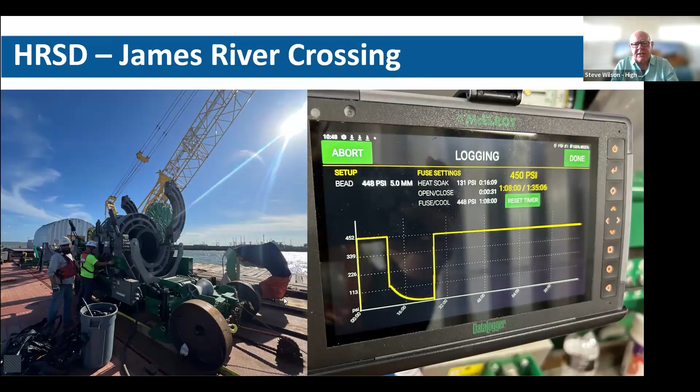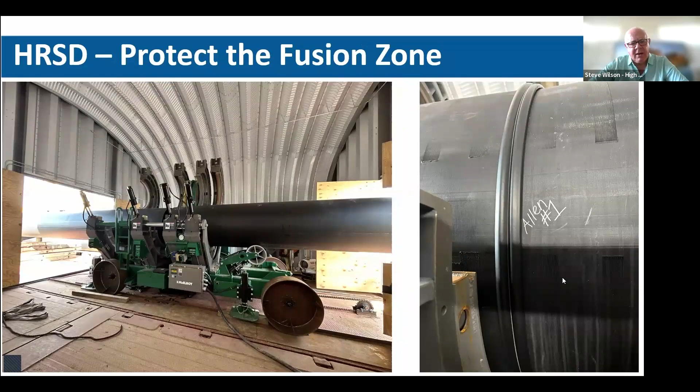Steve, you mentioned that not only did you use the data logger, but you used some of your fusion techs to help Garney. Is that correct? That's correct. Yeah, on all the 42-inch line, they wanted certified welding techs to weld it together. So we had our techs do all the initial welding. Every 50th joint was tested - they had to cut it out and do the side bend test that we were showing there briefly. And at this point, going forward, Garney is using all their own people to actually do the fusion and lay the pipe in.

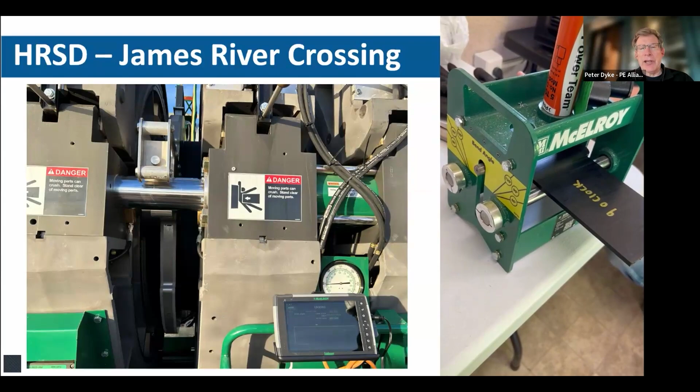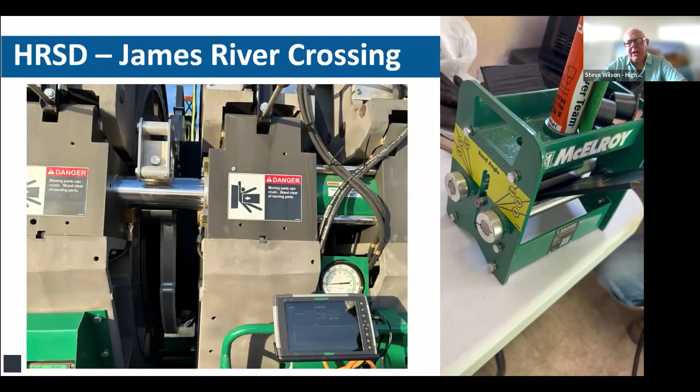So what we're seeing there, Steve, is that side bend test. How often did you do the side bend test? Because it's a destructive test, and you had some pretty big pipe there. Every 50th joint was what was required in the spec. So every 50th joint, or anytime a new technician came on the project, he had to be qualified through the side bend test. Okay, well that's incredible.

So there is a video. It's available on YouTube. Just search Garney HRSD, and I think you could find it there.

Steve Wilson, great job. Thank you so much for sharing your knowledge with us. And I'm sure the project team really appreciated your knowledge on that HRSD crossing.